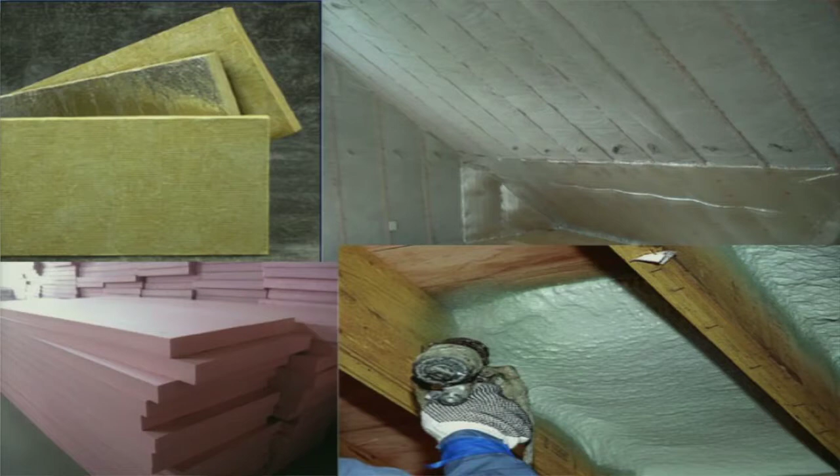Insulation, right? I don't care if it's mineral fiber, glass cellulose batts, extruded polystyrene insulation, expanded polystyrene, spray foam, cellulose, or ripped jeans, right? Cotton, doesn't matter. We're building 2012 code, it's about that, maybe a little bit less. We're building this thick, where we should be building this thick, somewhere around there. We're not using it right. It exists all around us. The insulation aisle at Home Depot or Lowe's, Rona, Canadian company. But we're not using it.

Windows. If we look at the U value, here's a building science lecture in 30 seconds or less. The U value is heat transmission. It's energy through a square meter for a temperature difference. So if you draw a square meter and you just visualize this energy flowing through, how much energy is going to flow through that square meter for a 1 degree temperature difference, from 20 to 21. That's what I'm visualizing here.

2012 OBC, the Ontario Building Code, is considered aggressive, or it's a big step, people say. And the U value there is 2. One of my research houses, I didn't go out of my way to get these windows, and the overall U value of the windows in my place is about 0.9. More or less the best in Canada right now.

It's about 0.6, 0.65. And the passive house standard, which I'll allude to in a few minutes as well, is a very aggressive low-energy building standard, started out of Germany, it's gone across Europe, and it's making headway in North America. We're talking 90% energy cuts here, very aggressive, where we have to be. 0.5, 0.45-ish, right? A quarter of what we're doing right now. So the technology exists. It's off the shelf, but we're not utilizing it.

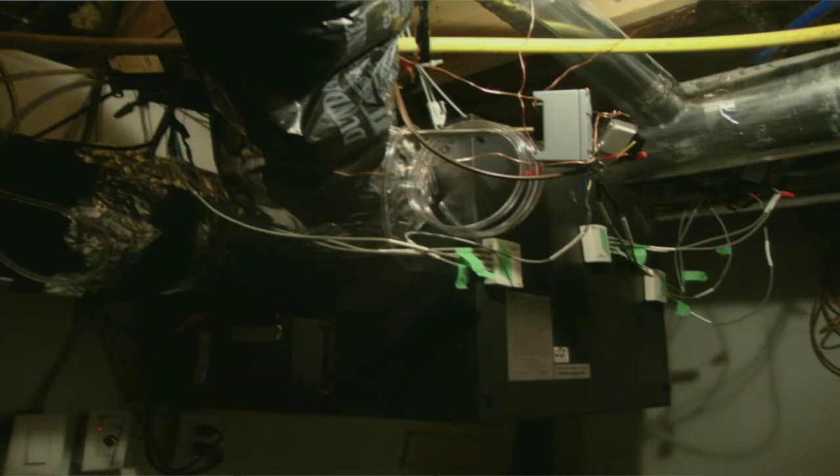And the third one, it's better in dark light. What you're looking at here is a big black box, so it's actually showing pretty well. It's a heat recovery ventilator in one of my research houses. It's actually an energy recovery ventilator. So if you know HRV, the H is for heat, that's just for dry heat. ERV, energy, that's for dry heat and wet heat, latent heat, sensible and latent.

So what's happening here is you have fresh air supplied to the house, stale air coming from the house, fresh air from outside, it's insulated because it's cold, and stale air going back to the outside. Now as a building scientist, I preach you need to tighten up your envelopes. You need to minimize the uncontrolled leakage of air because air represents something that has to be conditioned, which represents the use of energy. So as we tighten up our envelopes,

we now die. We don't have any fresh air. So people figured that out, believe it or not, trial and error, sick building syndrome, and they said, oh, now we have to introduce fresh air. And so I go as a building scientist, tight, tight, tight. That's my camp. And then I say, why?

Well, because then you could say, fresh air, I want you to come through my building right here, right there, because I know you're not getting in anywhere else. You're going to come in right there. And not only that, I'm going to throw you through something that recovers energy. Aha, the technology exists. The reason there's all these wires, don't be afraid of that.

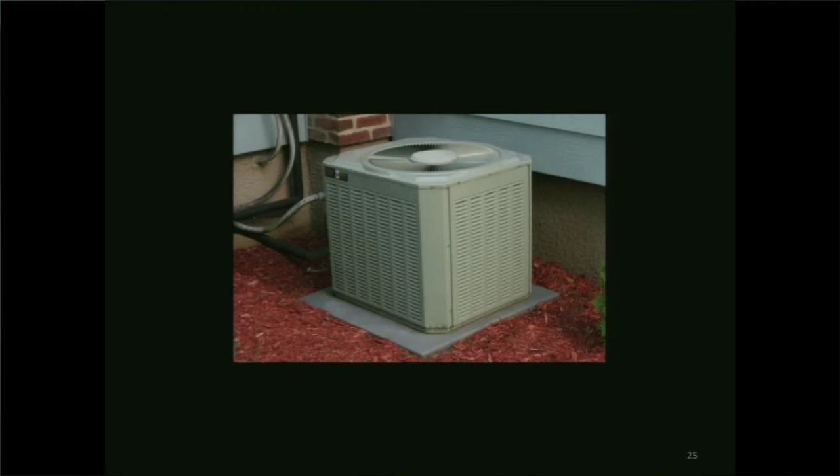Tom alluded to the low-hanging fruit. To me, the thermostat. 3-4% back of the envelope right there. We lower the thermostat in the winter and raise it a bit in the summer. The AC, the ubiquitous central air conditioner. Most of my neighbors turn it on June 1st. They walk away and they turn it off September 15th. And it's about adaptation. It's about people expecting everything to be perfect. I argue that it's about living with the seasons.

People think I'm crazy. I've actually had neighbors go up to a student that has done some research in the neighborhood and go, oh, that's a professor in that house. Why are those always open in the summer? And I'm like, oh my goodness, this is what we're dealing with. Well, it's because most of the time it's comfortable. There's about, by my calculation, 2 to 3 weeks that you actually need the air conditioner. Obviously, this is augmented by the fact that the house I live in is well insulated, doesn't leak much, so I can smooth out those spikes in a hot day.

You walk around in the summertime, after a hot day, it's 15 degrees in the morning. My wife doesn't take walks with me anymore because she just thinks I get angry. It's 15, you're cold, because it's the summer, and everywhere you look, you hear these central air units pumping cool into the house. It just doesn't make sense. Turn off the lights. Well, that's straightforward. Look downtown at night. Kind of wonder, especially the office buildings. You go for the next 10%.

Non-invasive air leakage mitigation. Okay, you get a blower door, you suck out air, you force the air leakage to happen, you go around with a lighter, you don't burn down your building, you find the leaks, and you fill them up. I show this to my students a lot. This is the grade everybody wants, right? There's no COPs of 3 in academics, right? That's what you want. Why don't we want that for our appliances? Why don't we want that for our combustion appliances? People still buy 80-85% efficient furnaces. You can get 90-96% efficient, 98% efficient boilers. I already alluded to 300% for heat pumps and that sort of thing.

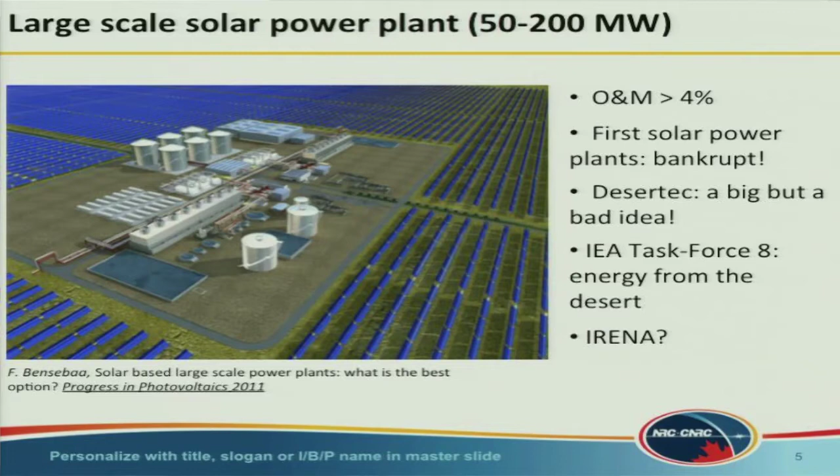If you don't look at the blue part of the picture, you may see that this is like a fossil power plant. Actually, this is a solar power plant. It's what's called a solar thermal power plant, 50 to 200 megawatts. Then you need to build the grid. I guess you all heard about this Desertec project, where you can build a large solar power plant, build the grid, and transport energy to Europe. Actually, there's no grid to do that. And if you want to build that grid, I don't think you will build it in the next 5 or 10 years, at least.

For those people who know me, I was involved in the IEA task force. I agree with a comment from Tom Rand. It's a very, very conservative agency. And for them, solar technology is about building this type of plant. We talk basically about comparing solar technologies to nuclear.

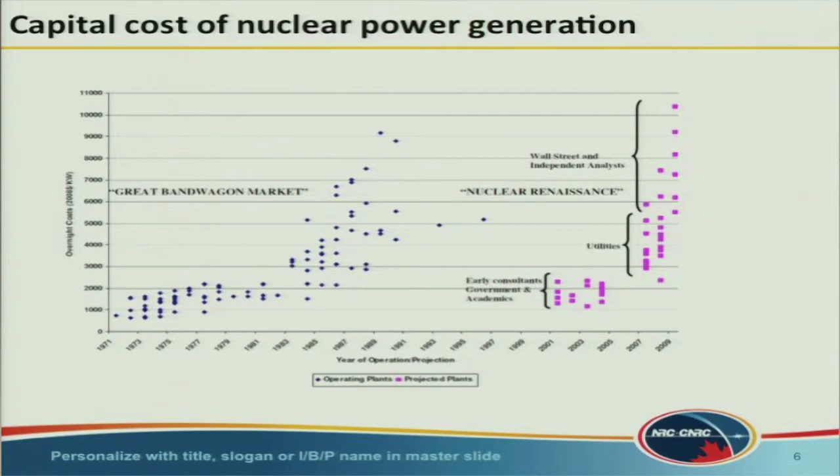We hear a lot that nuclear is very cheap. You always have these numbers, which is basically $1 a watt. Actually, in reality, it costs mostly more than 10 times that. Why this difference? Some people say the hidden cost. Other people say that it's a lie. It's actually a combination of the two. When you build a solar greenhouse or PV rooftop, you never hear of someone paying more than they had to pay from the beginning. If you have a bill, it's good. In a nuclear plant, it's always 2, 3, 4 times more expensive. This is a hidden cost.

And there's also, for example, one of the things that very often happens with these nuclear power plants: the comparison. It's very difficult to compare. This is a calculation made by a group in the United States. Actually, right now, if you really compare the two, although it's very difficult, the cost is about the same. I'm not talking about capital cost, the cost of electricity. But in reality, it's very difficult to compare.

Russell mentioned why we don't shut off the lights during the night. Because if you had to shut off all the lights during the night, you'd have to shut off those nuclear plants, and you cannot do it. The calculation often is made based on what we call base load versus peak load. This is why it's always very difficult to do the comparison. And smart grid, although I'm not an expert in smart grid, is basically going to help integrate distributed power technologies.

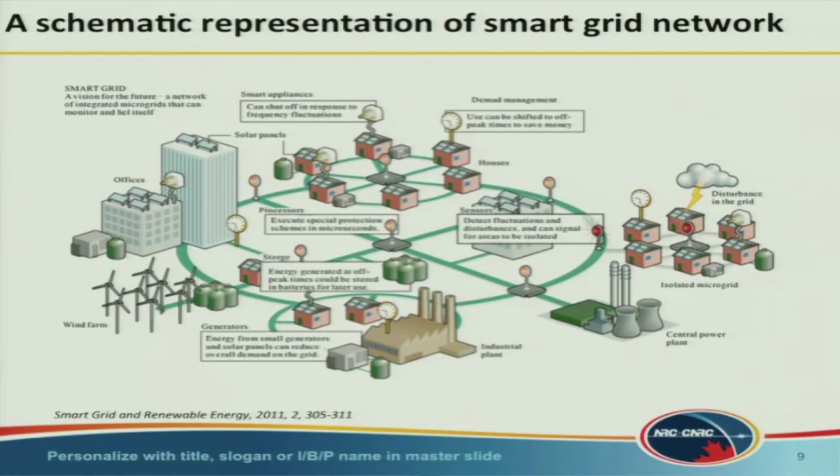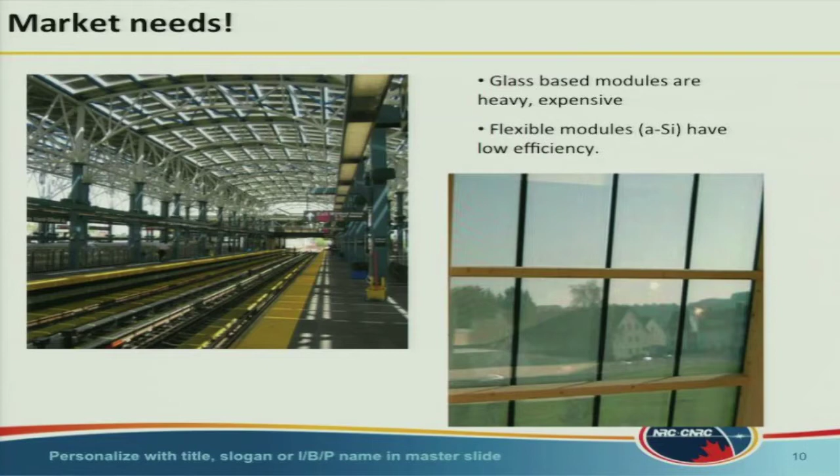Or you can use current thin film. But they both have challenges. The biggest challenge of this technology: they're either very heavy in the case of crystalline silicon, where you have to use glass, or in the case of thin film, which is more flexible, the efficiency is very low. You don't have enough area to cover your needs in terms of energy. Those are the two issues.

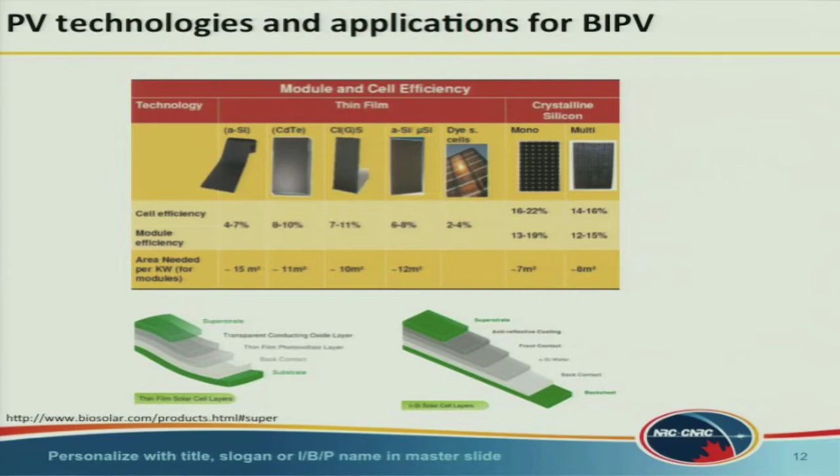Most of the technology you had was amorphous silicon. It can make flexible solar panels. You can integrate them in any shape, but the problem is very low efficiency, and for each kilowatt you need at least 15 square meters. You have crystalline silicon, which is high efficiency, but it's very difficult to do the integration.

Okay, this is basically what I'm trying to sell you. There's a technology called CIGS. It stands for copper indium gallium selenide. It has both: it's high efficiency, and you can build it on a flexible substrate. A group in Switzerland reached 17.6% efficiency on a flexible substrate. But there's a catch. It's expensive, and the energy input, if you look at the life cycle analysis, is relatively high, because making those thin films uses quite energy intensive technologies.

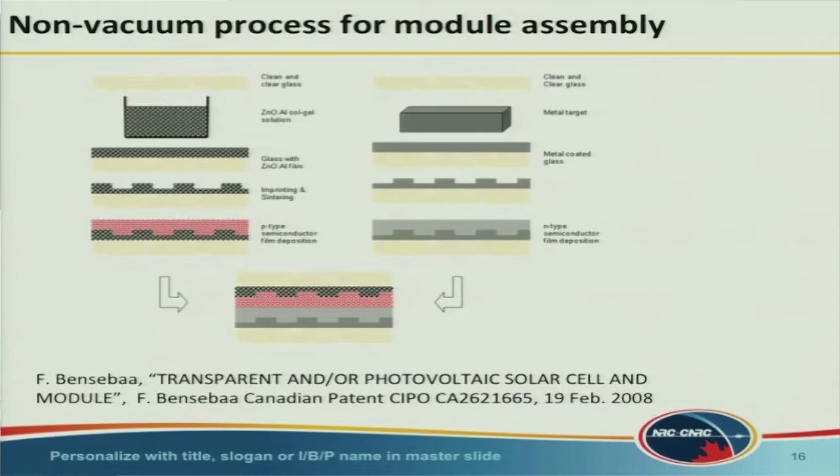In the case of photovoltaics, the message I'm trying to say is the technology is there. It's a question of developing it further and integrating it to address the issue of BIPV. I'm not just trying to pitch my technology. For the people saying that PV takes a lot of space, there is this technology from a Canadian company.

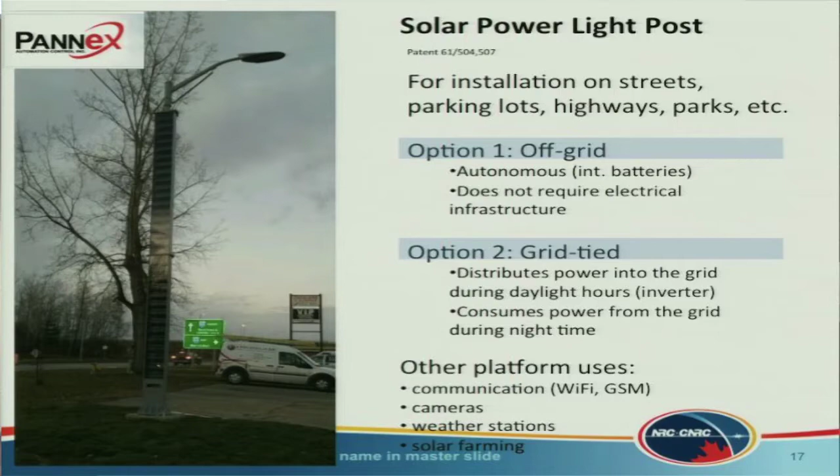I guess you all heard of this lighting system based on LED, which is powered by PV. They always have this large solar panel on top of the pole. Actually, they had a very bright idea. They're using the surface. I don't know if you see it very well, the surface along the pole. Instead of buying solar panels from the market, they built the small solar panels there.

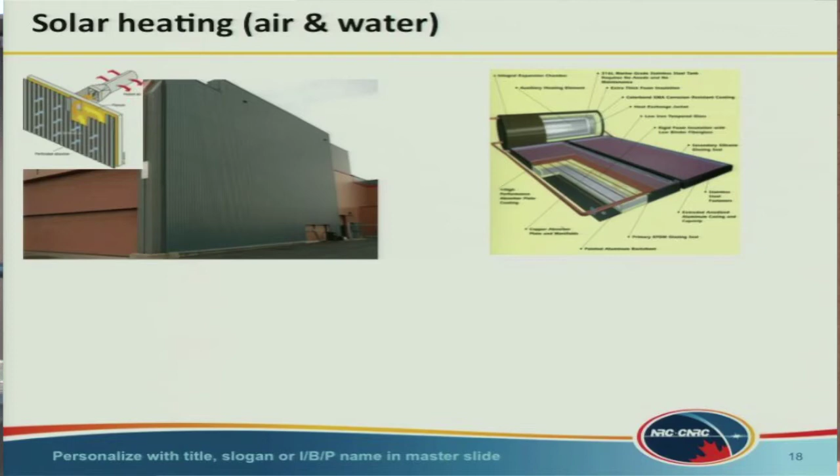I'm going to switch to the next topic with the solar thermal application, just to provide you with one example. I guess everybody knows in Toronto about the solar wall, where they use basically solar thermal to produce heat. In theory, we can also use this heat to cool the building. It's a worldwide known company, and everybody knows also about using solar to heat the water, which is on the right side.

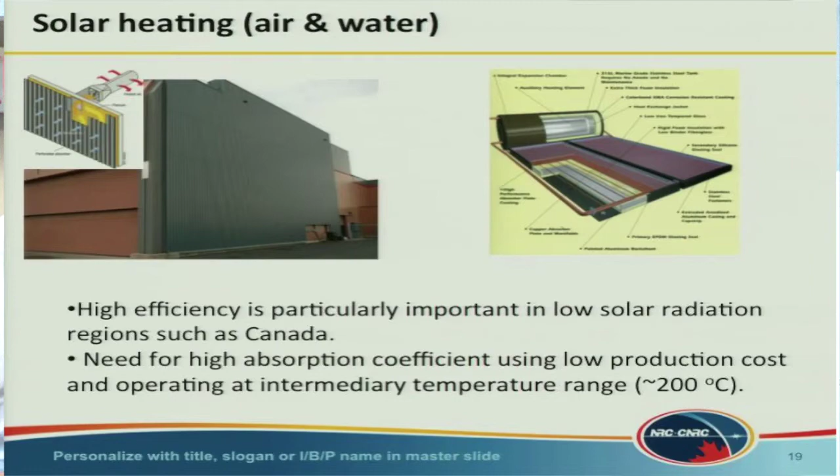Right now, one of the biggest challenges of solar thermal is low efficiency. Here, for example, just to address the market, they use a very, very low efficiency heating system, absorber system, and this is why most often you see it just on large commercial buildings where you have a lot of surface area. You do have a lot of technologies where you can actually use smaller surface areas. This is one challenge, the efficiency, and the second challenge is actually flexibility of the substrate.

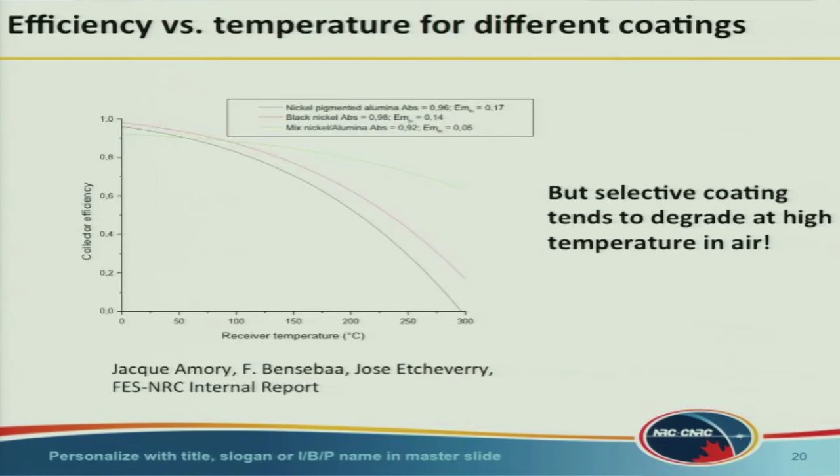In collaboration between NRC, York University and also a university in Belgium, we embarked on developing a new technology that allows you to have high efficiency on flexible substrate. The goal is to have this technology operate at high temperature, around 200 degrees C. As you can see, in current technology, when you operate at high temperature, it tends to have a lower efficiency, and there's also an issue with degradation.

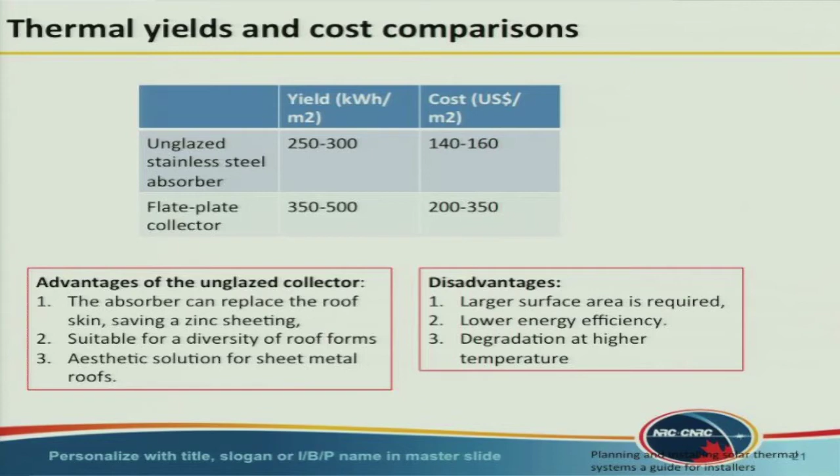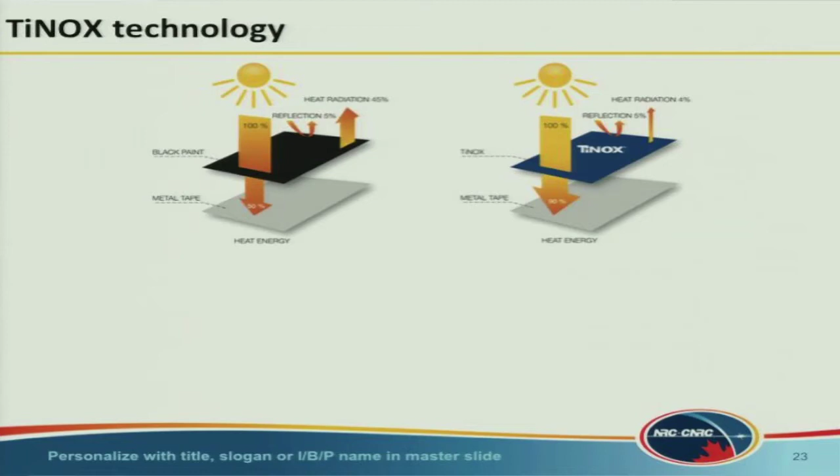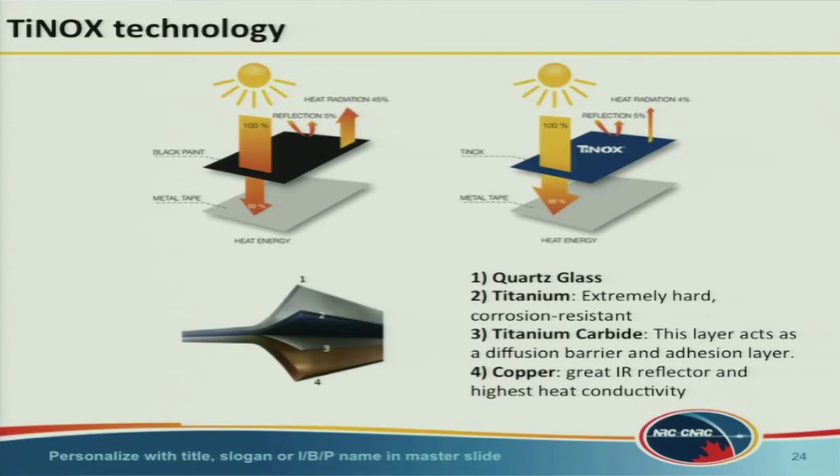Right now in the market, you have two technologies: one high efficiency, very expensive, and one low efficiency and cheap. What we're targeting now is something intermediate between the two, and flexible also. For example, this is a very good technology from a German company where it can obtain a very high efficiency. It's called TiNOx, basically titanium nitride coating, where you can have very, very high efficiency, but unfortunately the cost is quite high. And they also have issues with degradation at high temperature.

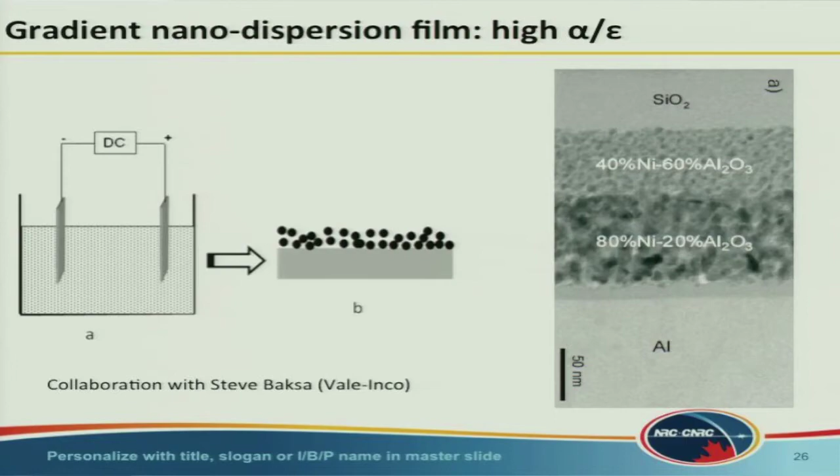In our case, as mentioned by Peter, we're trying to use nanotechnology, and we use a technique called electrophoretic deposition. We can deposit this material on any surface. We did it using nickel nanoparticles on aluminum substrate. We can do it on other substrates, and the processing is at room temperature. You don't need any vacuum system, and we did it in collaboration with Vale Inco. The only restriction is you need access to this high value material. Inco is one of the few companies who developed this technology, and unfortunately, they stopped because they didn't find a market for their material so far.

I just hope that I showed you that there are current technologies, photovoltaic and solar thermal, on flexible substrate. And as I mentioned in the case of the application, the policy needs some improvement to adapt to the current needs. Thank you very much.

Thanks, Farid. I was very intrigued by your slide of efficiency, performance versus temperature. Like many graphs I've seen of this type, it starts at 0 degrees Celsius. My question is about applications, since you work for NRC. In Canada's far north, the temperatures are far lower than 0 degrees in the winter, and even in the summer. In the winter, there's very little sunshine. In the summer, there's almost 24 hours in many cases. If you could extend that graph backwards, what type of efficiencies would you see at -20, -30, -40 degrees?

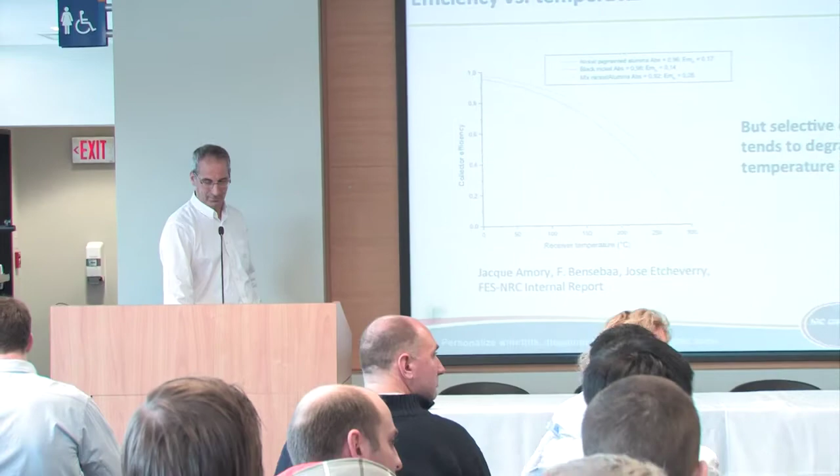I want to make a small comment. I liked your slide at the beginning, talking about putting the big solar projects that need greater development. This is commenting basically on that line. I think one of the costs of solar is the grid here, the distribution costs. It's a hidden cost. For instance, smart meters cost us $1 billion. The hidden cost of distributed energy, whether solar or wind, is something like $8 billion or whatever. That's what we don't see.

So when you're comparing nuclear to distributed solar, you actually have to take those distribution costs into account as well. So I like the idea of doing more self-contained, smaller units; it's probably wonderful and more viable. So, actually, it's even worse than what you said. There's distribution, but what I was talking about in the case of the desert is actually transmission. Yeah, that's right, that's distribution and transmission. That's correct. Any questions? Great. Thank you very much. Very good.

I'll just make a comment if I can. It was really interesting to hear Farid's background, and it's great to see the research being done. Interesting question about the smart grid and who should bear the cost of it. To me, one of the major features of Ontario's commitment to the smart grid is the ability to use time of use rates so that people in their homes no longer have to pay a fixed price. Because in Ontario we have different types of generation, some very cheap, like Niagara Falls, some very expensive.

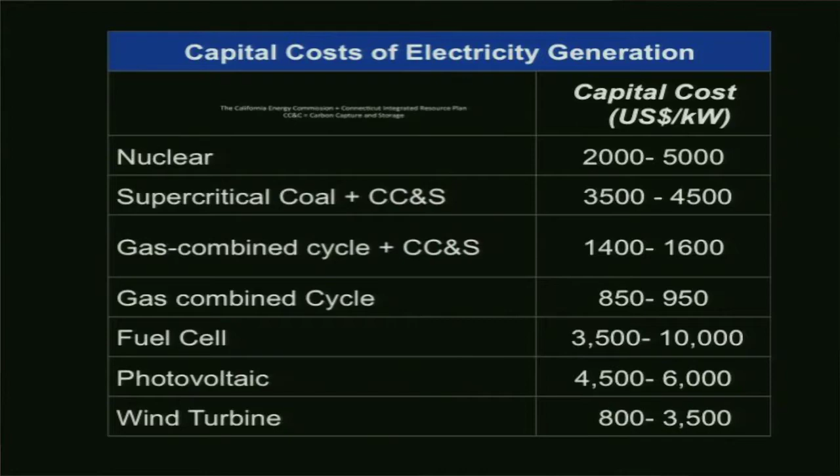That's my question. Something else that is being done for the building sector at EU level is, instead of regulation, a voluntary approach: there is the Green Building Program, sponsored by the Commission, started in 2005. And this is specific for non-residential buildings on a voluntary basis.

And just some conclusions. The energy sector has been considered, not now but years ago, as key to get out of the crisis. The energy efficiency goal is the one that probably won't be reached. Building is the sector where energy saving and energy efficiency measures are far from being fully implemented. So there's much more to be done. And for me, what is really annoying is all these time frames and delays for implementing these measures.

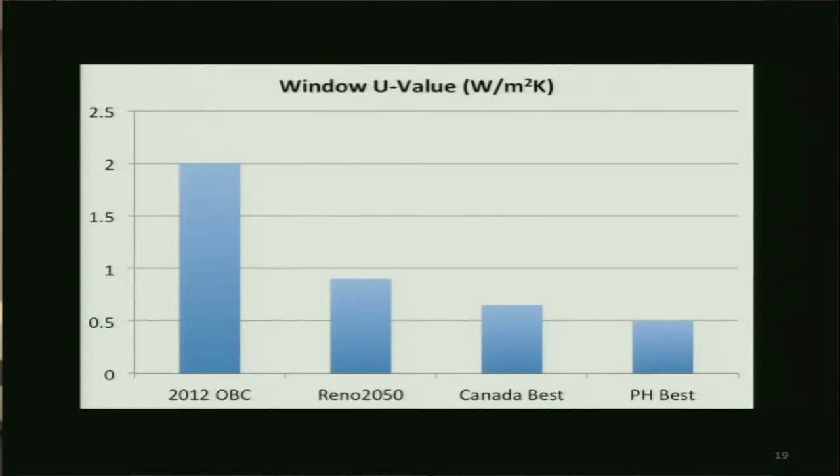So if we have, for example, deep geothermal energy, we have a project in Munich, it comes out with 90 degrees, you supply your existing city quarter, which needs these high temperatures, then you go to a new building quarter, and they maybe have floor heating systems, and they can get by with 30 degrees. So you try to cascade the temperature levels, a bit like in electricity networks. You have different voltage levels. In heat, we also need to think of having maybe different temperature levels to adapt better to the demand and to make the network more efficient, because that means for a given mass flow, you can use the energy much more efficiently.

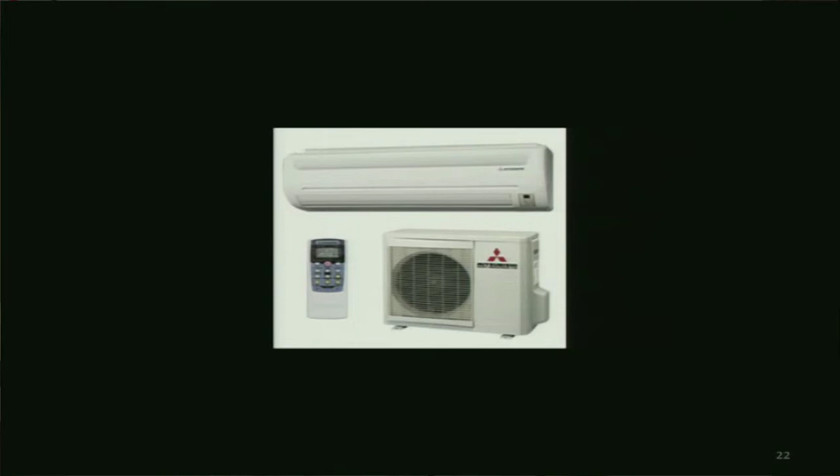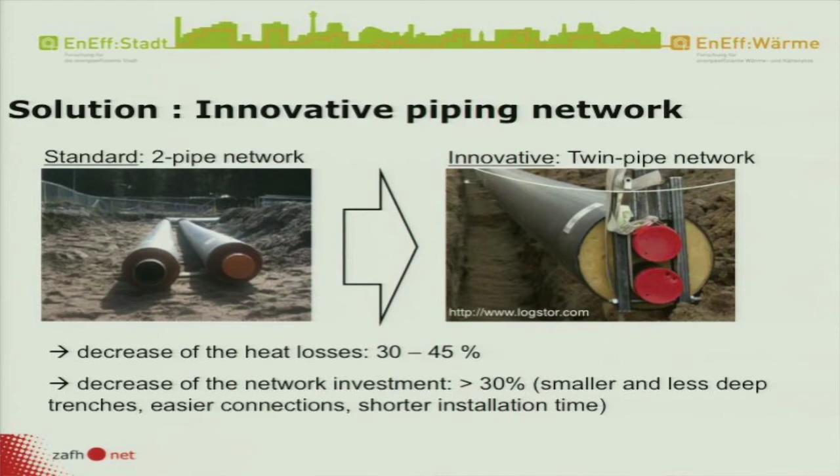So what are the solutions? Obviously, the solution also for networks is to insulate well. But it's a cost issue, and the industry doesn't want to insulate as much as the scientists would recommend. But there are now many networks built with more efficient insulation systems, these twin pipe systems, and just by better insulation we can easily decrease the heat losses in the network by 30 to 45%.

And also it's cheaper, because if you go for this twin pipe system, you need less space, it's easier to connect, and so on. Then there are also some technology developments using new filling materials, which again have lower heat conductivity, with the same aim to reduce the heat loss from the network.

Heat meters are much more expensive than electricity meters, and we're talking about investments of 6,000 to 10,000 euro, or Canadian dollars, more or less the same. So it's actually quite expensive. That's more expensive than a condensing boiler. And if you then talk about a passive standard building with a very low total heat demand, it never pays back.

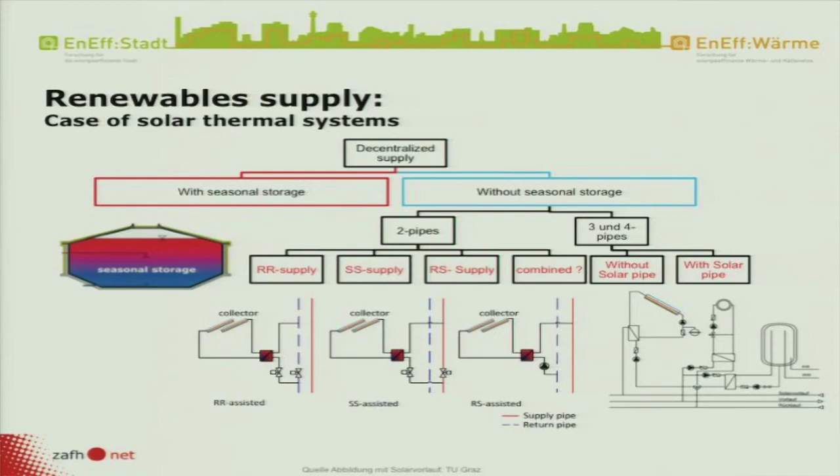The supply companies like this option because in this case the customer or the solar thermal producer has to pay the pumping energy. In all other cases, you see there are no pumps involved here; the energy supply company needs to pay the extra pumping energy. So they like the return-supply solution, and, as I said, it costs a bit of electricity.

And then we have quite a bit of discussion of decentral heat generation in buildings, because the solar systems will be on your roof, and feed-in of solar heat. This is not happening now. Just now, all the solar thermal energy gets used in the building itself. I haven't seen any project where there's a feed into a network, because then you need to pay for it, you need bi-directional heat meters. It's all not so trivial. But I think we will have that. If we have more and more solar thermal on buildings, we need to talk about feed-in as well.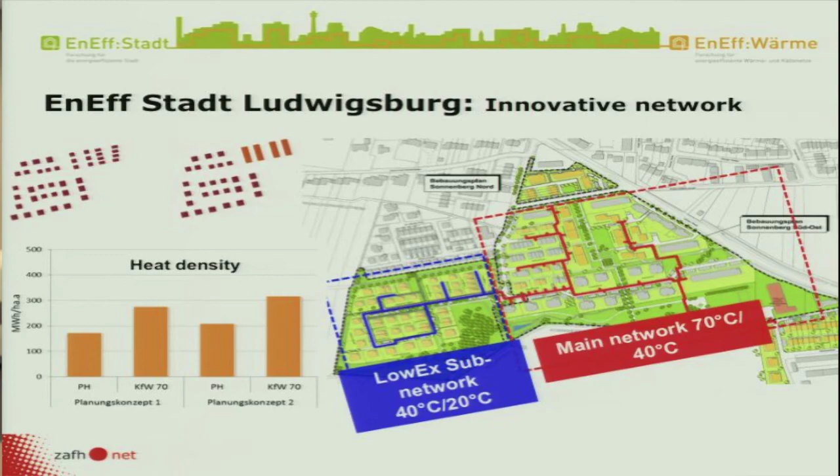And what is already in place is a heat pump. This is the main energy supply, a 200 kilowatt heat pump coupled to about 115 meter geothermal heat exchangers, a field of 50 of these heat exchangers. And in addition, there's a conventional gas-driven CHP engine, and then some gas boilers for the peak loads. So there's a machine house, and the geothermal field is by the side. This is already all in place. The conventional network is in place.

And what is very interesting, and I hope during the next years we will get the monitoring results: all substations have smart meters, so we get very detailed thermal load profiles from every building. And what is also very interesting, we can do some demand side management there, because the supply company who runs the whole system has access to storage loading. There are domestic hot water storage tanks in every building, and they can say, well, we have energy at 2 o'clock at night, I'll charge your boiler now. And so they can do some load shifting from their central system.

A topic which is also very interesting from a more academic point of view, but not just academic: we are now going very strong on three-dimensional city modeling. The whole state of Baden-Württemberg will have a 3D model of all buildings in the state.

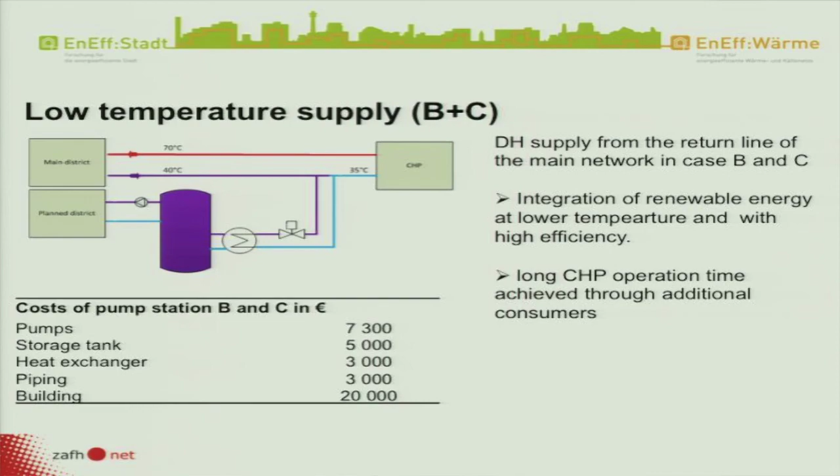And the big advantage I see is if we have such a low temperature network, then it's very nice for solar thermal energy integration. Because if you talk about 40 degree supply temperatures, you can really run a flat plate collector with good efficiency. And I think that's the main argument, because you'd see the CO2 emissions. I was surprised about the results.

So obviously we had to do the cost calculation. The total cost per kilowatt hour in the existing district was about 8 cents per kilowatt hour. These are full costs, and you see the city extension will increase the overall price, because the heat demand is so low, and you still have the same investment cost.

But you see all these, whether you go for high temperature, medium temperature, low temperature networks, more or less the costs are the same. I would say it doesn't really make much difference. Only the heat pump option is much more expensive, because it's not just the investment of the heat pumps. Here we sort of distinguish between capital costs and operating fuel and other costs.

And you see the investment costs of the heat pumps are not that much higher, but now you need to heat up basically all the water from 25 to your heating temperature, and you need much more fuel. You have much higher electricity costs. So all the others, as I said, are very, very comparable in terms of economics.

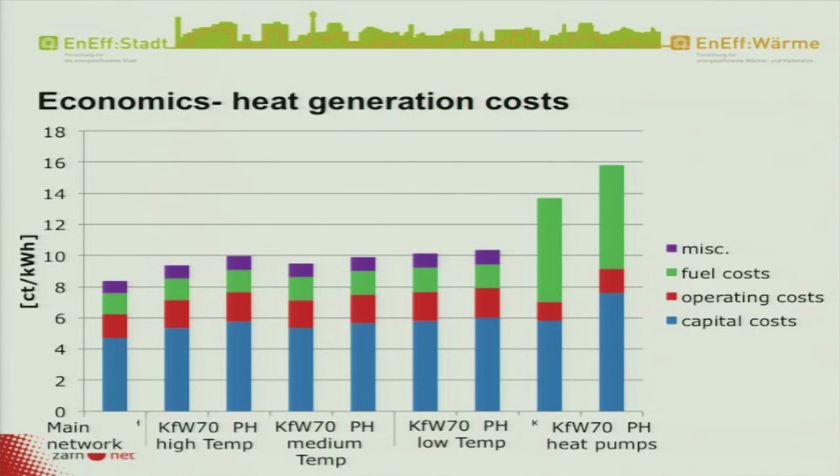And then obviously what we expected, if you start reducing the temperature level of your network, the heat losses go down. It's fairly obvious. You see again the two building standards. If the district is a passive building standard district, and you build a conventional 70-40 degree network, you have 30% heat losses. It's not marginal.

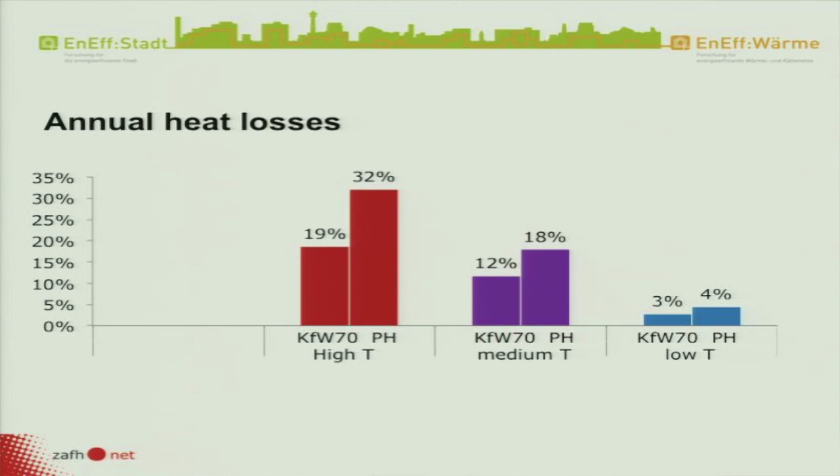It's really significant, and that's why these medium temperature solutions are interesting, because then you bring down your heat losses, even on a passive standard district, to 18%. Obviously, if you go further down, the losses are even smaller. So that's good news. So I would definitely recommend the medium temperature system.

And then I saw the results of the overall CO2 emissions for these different network solutions, and I couldn't understand it. I thought the researcher had made a mistake, because if you looked at the conventional solution, the total CO2 emissions with the standard network extension, with high heat losses, 30% in the passive standard, were lower than all the medium or low temperature systems. So that was bad news. Although we have much lower heat losses, we still didn't reduce emissions.

And then we looked very much in detail in the results, and the explanation is the electric direct flow heaters, which are needed then, or it depends a bit on the assumptions you make. Maybe we could save there a bit, but you need just more electricity for your domestic hot water if you bring temperature levels down. That was the main argument.

So basically the message then was the costs are more or less the same, you have lower heat losses, but you don't necessarily reduce emissions because you will have to look at your domestic hot water. But then solar thermal could come in. And so now we're trying to convince the energy supply company to invest in solar thermal.

They don't really like it because they say, well, we have a gas cogenerator, we have so much heat in summer, it sort of decreases the economics of our cogeneration unit. And I think they will only do it if we can make sure that their cogenerator is used elsewhere. So we're talking now about an extension of the network into a neighboring old city quarter, and they could dump all the heat in summer. But it's an issue, so it's not easy to bring in solar thermal if you have cogeneration engines around.

Here we talked about this sort of heating flat rate also, which would be nice for the supply company because they could cut their costs. The substation investment would really go down depending on what type of network you have with the flat rate, especially for the medium temperature networks. You could really go for cheap substations, but they are not sure that they want to do it because it's also a customer relationship issue, whether you really trust your customers then not to open all the windows all winter and heat a lot, and they find it risky, so we'll see.

Okay, to conclude, I think this concept of smart grids or virtual heating plants is very important also for the heating sector, because if we have networks, then we can much easier integrate all forms of renewable heat sources, solar thermal, and so on, and we can make use of demand-side management much better than individual buildings. Solar is obviously much easier to integrate if you have low temperature networks, and we need some more work to be done for distributed generation on the thermal side, new heat meters, new control strategies, and I think the last one, what did I want to say?

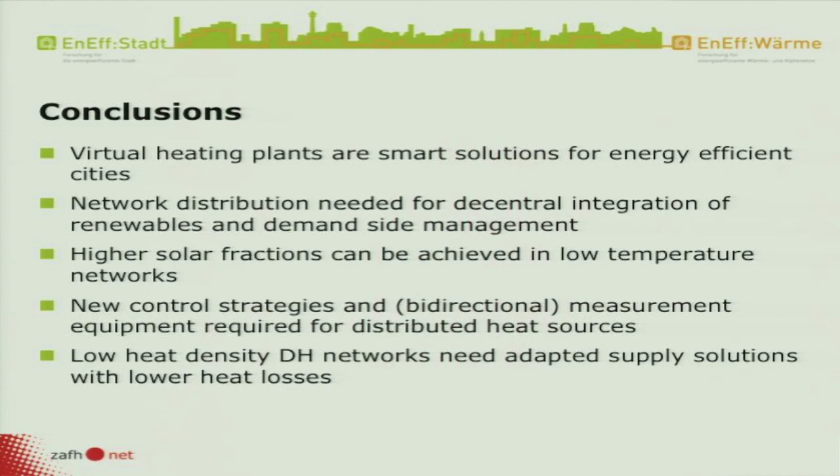Yeah, the first topic I talked about, if you have reduced demand, then we need to adapt our distribution and supply structure to make it efficient enough to justify the extra costs for network solutions.